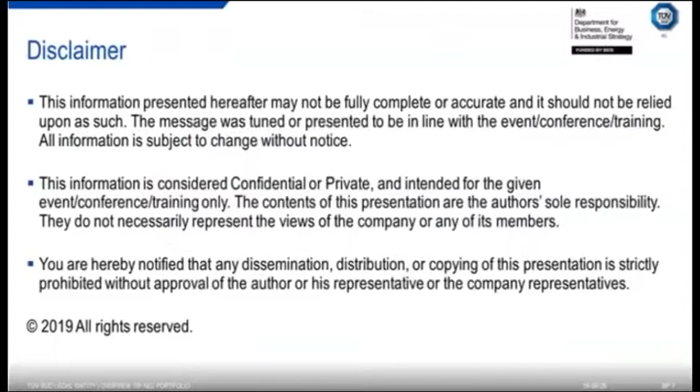So the contents will be a quick overview of what is NEL, if you don't know about NEL. And then I will develop my talk around the new facilities that we have here. Very often on my slide, you will see I call it AMF, which stands for Advanced Multiphase Facilities.

Through this new facility that we are building here, or which is built now, I will propose and discuss about a joint industrial project about validating the measurement of multiphase flow meters and wet gas meters.

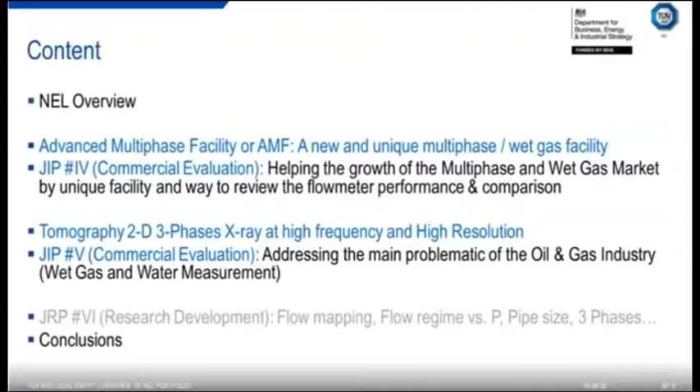So, NEL, National Engineering Laboratory, we are on a campus here in Scotland. As I said on this slide, it's a one-stop shop for anything related to flow measurement and density, could be in single phase, could be in multi-phase.

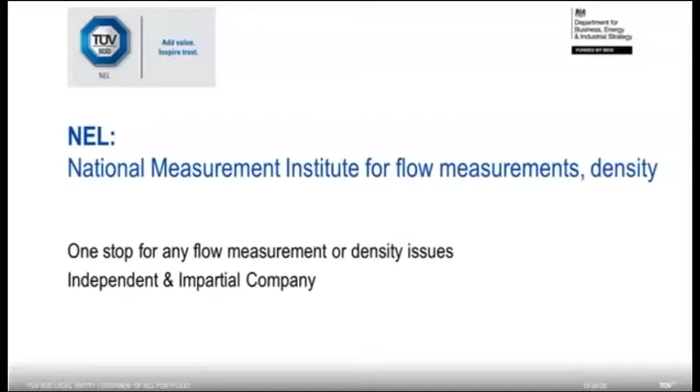NEL is an independent and impartial company, which is part of a much bigger corporate company called TÜV SÜD, and this is why you can see the logo with the two companies on the left side.

NEL was established some time ago, just before I was born, and went through different processes. I would say the key one was in 1995, where NEL was, as I mentioned on this slide, half a public company and half a private company. And this is what I mentioned previously, with the fact that we are now part of the TÜV SÜD corporate.

NEL is, and that's something very important to remember, a National Measurement Institute, so we are a primary calibration facility for single phase measurement, could be in gas, oil, or water.

We are conducting some research on behalf of the UK government, and we're getting some funding from them. This is why, again, I'm mentioning that we are a public company.

We are roughly 100 employees here, 10% doctors and 45% engineers. Really the core of our work here is about traceability, accuracy, and calibration in the first place.

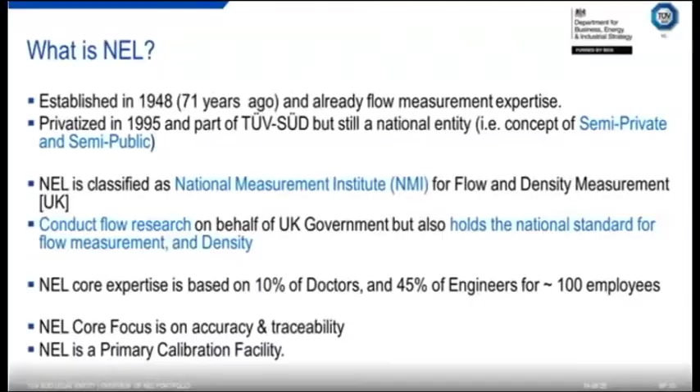So what are our customers? We are in oil and gas most of the time, and I give you some logos here. If we look at the metering side, through the survey that we have done, it seems that we have handled more than 98% of the products existing on the market in terms of flow measurement, either in single phase or in multi-phase.

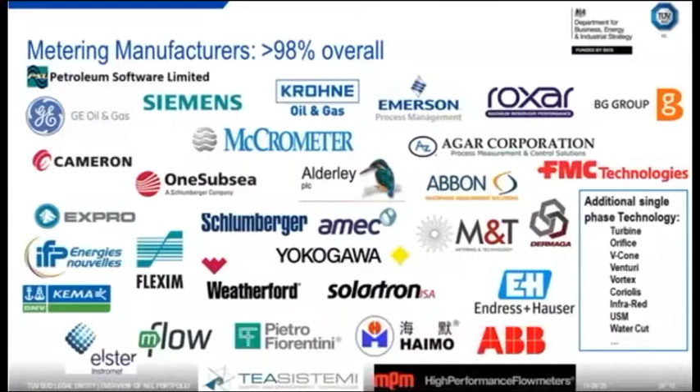Our structure is a very flexible structure around three main poles. One is research and development. The other is facilities and experiments, and I will show you the latest one. And in green, the services that we are providing to our customers around the world. People can interact between these three main poles. We have a pool of international experts in different domains that will float among these three entities.

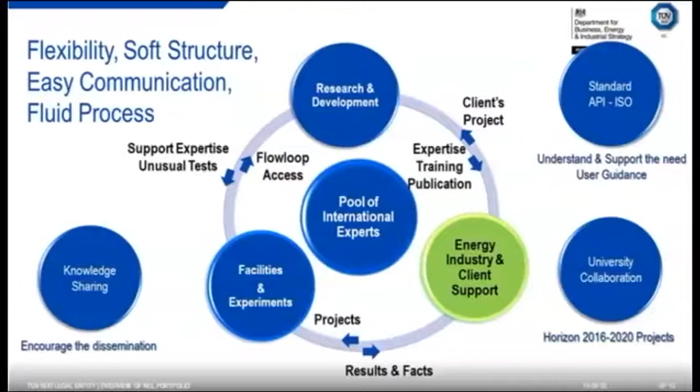On top of that, we are known to work on standards, with some of you probably, on API and ISO. We have a lot of interaction with universities in different areas, and one of our strengths is being independent. We are sharing our knowledge through either conferences or training.

This brings me now to something unique, new, and I will try to explain how we came to this solution. You see the summary already, it's 20 times bigger than what is existing around the world, and I will justify this statement just after.

You may be surprised to see another logo on this slide, but to develop this facility, which cost roughly $21 million, we needed some sponsors, and this came from the mother company TÜV SÜD, but also from Scottish Enterprise, which was able to support this new project.

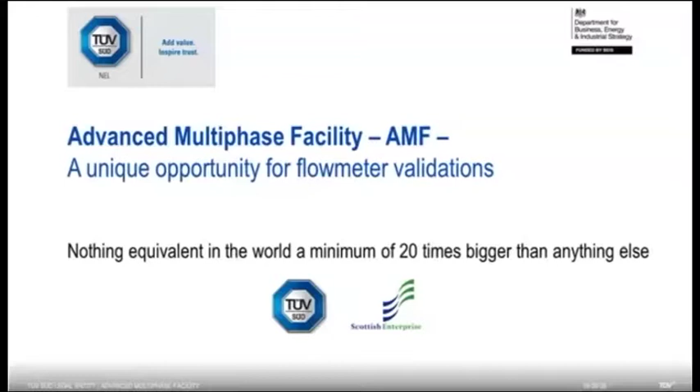Building a new facility could be interesting, but at the same time, NEL already had 9 facilities by 2014. We have facilities for single phase calibration under water or oil, capability to look at calibration of single phase under pressure and temperature, some erosion flow loops, and we are also deeply involved in produced water, looking at contamination of the water, either with sand or oil.

Obviously, with such a portfolio, you try to improve your product over time, and around 2014 we saw that we would not be able to address the market beyond 2020, so we needed to change the way of thinking about that.

To invest money, the first thing you need is a proper understanding of the market trend, and this is what we did, interacting with our key customers, which I'm listing here in a generic way - in the oil and gas domain, like national oil companies, international oil companies, or independents.

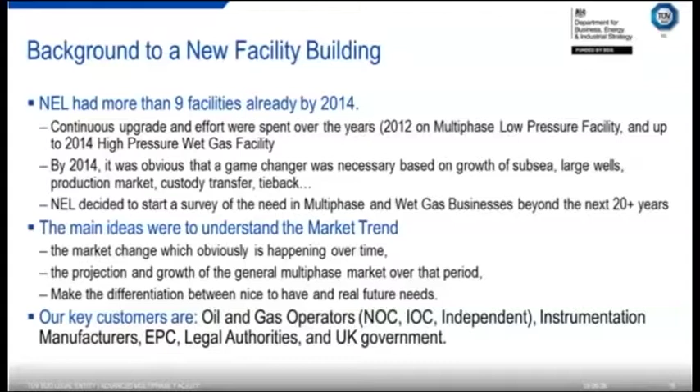The first one refers to the subsea market. There is a big interest in the subsea market, you may know it's growing, and on top of that, they want to be able to test and verify the performance of the meter in an independent and impartial way. So they needed a facility capable to handle large flow rates, capable to go to higher pressure.

The second point, as I just mentioned, is that in the subsea market you'll go to high pressure. Most of the facilities existing around the world are at 60 bars or below, and they wanted something to go way above that.

The business also has been moving over the years, you may know that. We were in the oil industry, and more and more we're going to a wet gas industry, so they wanted a facility capable to address wet gas meters and able to accept a large quantity of liquid when necessary.

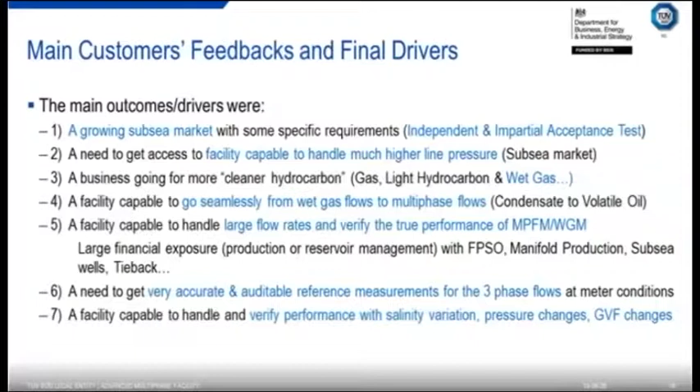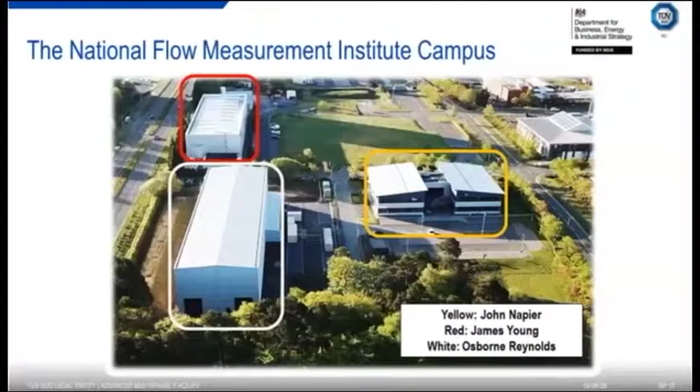I'll give you an idea of the size here. This building is 80 meters long by roughly 20 meters wide. If you prefer, it's almost half the size of a soccer field. This is where we will have these advanced multiphase facilities inside.

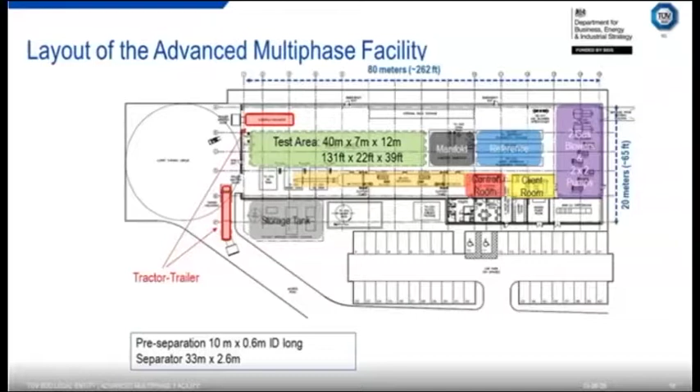To give you an idea, the separators are, for example, 33 meters long and almost 3 meters in diameter. So you may start to feel that this facility is huge, and we will definitely be handling large volumes in terms of flow rates. To give you a picture, you have 2 truck trailers on the left side that can go in and out of these facilities to bring equipment and so on.

We have, for reference, on the oil and water, they are twins, if I can say that. We have a 1-inch, 2-inch, 4-inch, and 6-inch Coriolis. And for the gas, in terms of reference, we are using either Coriolis for low flow rates or ultrasonic for large flow rates, with a 3-inch and 8-inch.

All this equipment obviously needs to be calibrated under pressure and temperature. You may know that Coriolis meters are affected by these parameters, and we have the capability here, through one of the other facilities, to do this calibration and traceability, which is essential in this business.

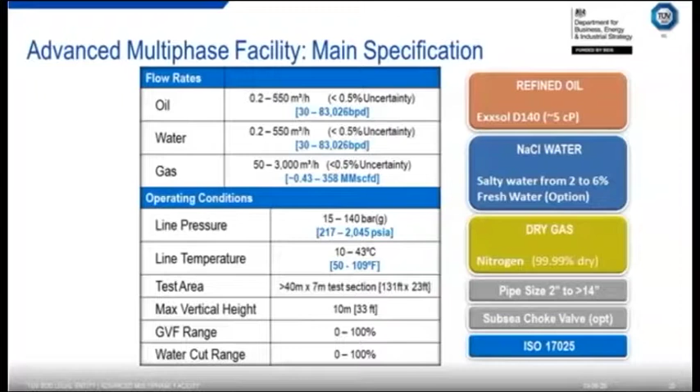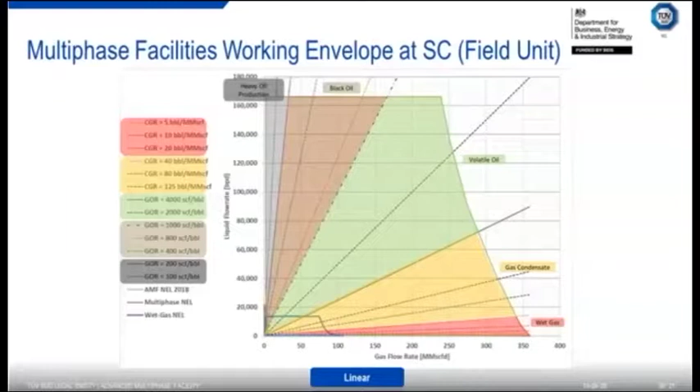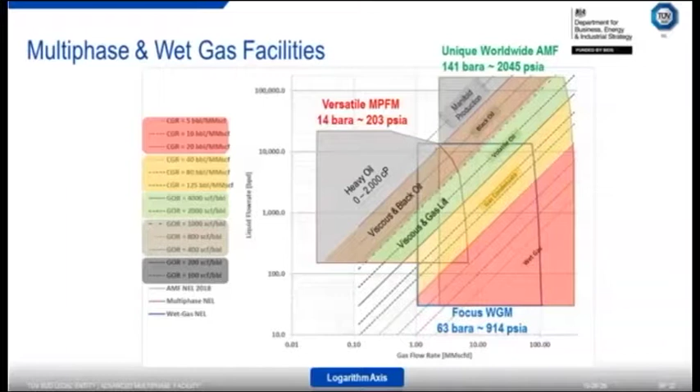We have the high pressure wet gas facilities, which was obviously called high pressure at that time. Now we have a bigger pressure with AMF, but it's shown in blue, and it's addressing wet gas business and gas condensate essentially. The loading or quantity of gas or liquid will not be above 15% in a base case, so you work with a condition where the quantity of gas is large. And we have the AMF, which is capable of going either on the liquid side or the gas side. This gives you an idea of the offer we have here, from low flow rate viscous fluid to high flow rate, low viscosity, or wet gas condition.

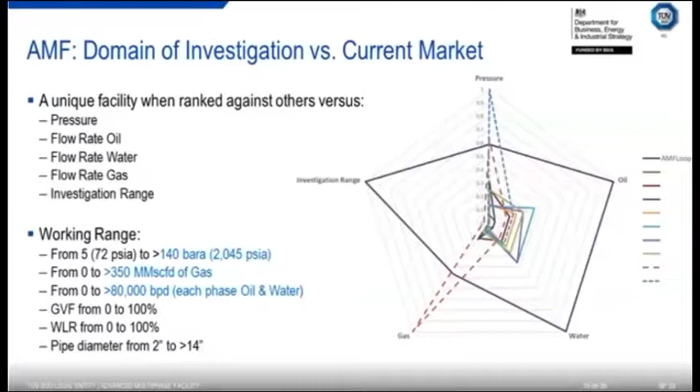So, stated differently, there is one facility that can go much higher than us in gas flow rate, probably 50% more, and there is one facility capable of going higher in pressure, but they are not capable of dealing with such a quantity of flow rate that we have here.

So what it means when you have such a facility, is that we can look at any type of flow regime and the performance of the meter in such conditions.

I'm presenting here, in this 1 hour time that I have, only one type of flow regime, which is the horizontal one, but you can imagine that the flow could be vertical if we want, and we are capable of addressing any type of them, from mist flow to stratified flow to bubble flow, plug and slug flow, annular or pseudo-annular flow. This is the capability of these facilities.

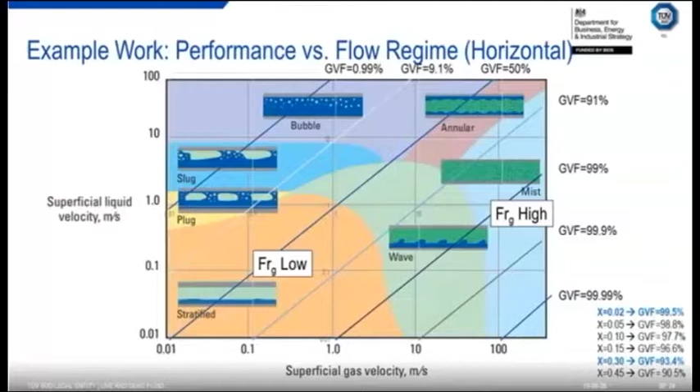You connect the meter and you can look at the performance in such flow regime. So, what are we capable of now with this institute here on this campus, in terms of business?

We can go from the brown, even heavy oil, to the green field. We can address from heavy oil to wet gas condition. We can address shale oil, shale gas, low pressure, either with a lot of liquid or gas.

Up to a subsea business, where you will be in a wet gas condition with high pressure, which gives us also this capability in terms of pressure to go from very low pressure on one of our facilities to 141 bar on the AMF facilities. Gas virtually from 0 to 350 million standard cubic feet, so you can imagine we are not talking about wells.

There are few wells that can do these things in the world, but most of the time 350 million will probably be when you have a commingled production from a few wells.

In terms of liquid, as I said, each phase can go up to 80,000 barrels per day, so together that will be 160,000 barrels of liquid per day.

And we can address any problem you may have today, in terms of solids, like fines or sand, erosion or monitoring, and we have a facility capable of handling up to 10% of such quantity.

I mentioned it earlier, we are working a lot on the produced water, and we can look at the contamination at the ppm level that is presented on this.

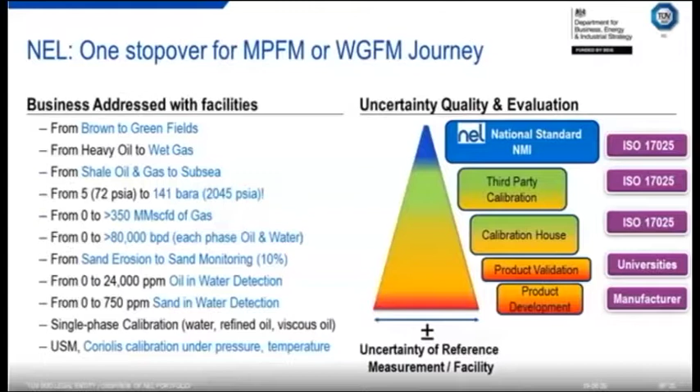This is something that also changes the quality of the facility where you are going to test your meter. I want to answer right now one of the questions that I very often get when presenting the MPFM. It's regarding the type of fluid we are using. The three fluids that we use are Exxsol, salty water, and nitrogen.

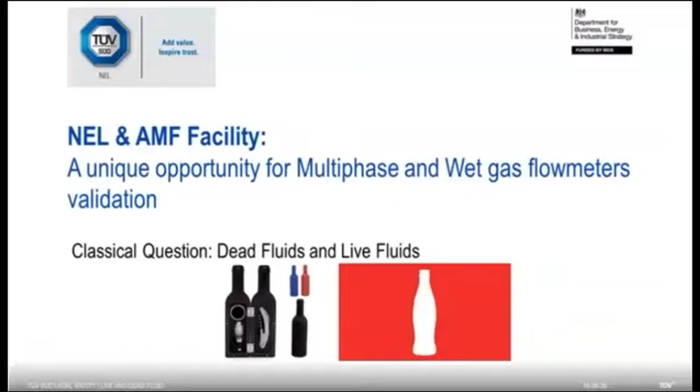Everybody says, yes, but in the field I have some live fluid, are you capable to handle such things? You may not know exactly what is dead fluid and live fluid, but I'll give you some shapes of bottles so you may understand what I mean. Some have gas dissolved inside, and some have no gas dissolved inside. This is what people are talking about when they say dead fluid or live fluid.

First thing we need to understand is if you are coming to these facilities, it is to test or validate a multiphase or wet gas meter. So we need to provide the best uncertainty measurement, and we need to do this work in the proper manner in terms of evaluation, either for the manufacturer or for the end user.

Keep in mind, there is a warning here: the expectation of the manufacturer and the expectation of the end user are not the same. You could be surprised by that. We know they are developing a multiphase meter and the idea is to get the best performance. If you look at it from a manufacturer's point of view, the idea is to provide a product capable of delivering the best uncertainty at line condition.

There are experts in some technologies, and they combine these technologies to develop a multiphase meter or wet gas meter, trying to improve or combine in a smart way these techniques in order to deliver flow rate at line condition. But as we know, at line condition you may have some gas dissolved in your oil, or some liquid condensate which is in gas form and will become liquid at standard condition, and therefore you will need to convert these through some PVT.

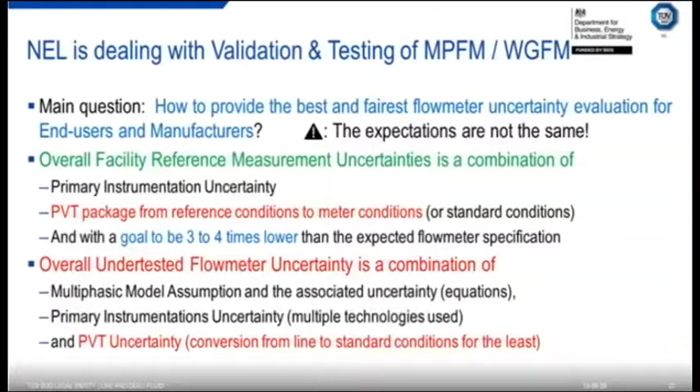On the other side, we need to face it: developing a multiphase reference flow meter is a complex system, and the uncertainty will be a combination of the model, the physics you will be using, the instrumentation or technology you will be using, and also the fact that you will need information about the fluid properties and the conversion you will need to do with that. This is what you are dealing with when you want to look at the performance of a multiphase flow meter or WGFM.

So if we look at it in a simple manner, we have the reference condition, which is delivered here by a facility on the left side, and then we have the measurements which are done with a meter.

Okay, the idea is to do the comparison between this cylinder, red for the gas, green for the oil, and blue for the water.

To do these things, you will need to use some numbers or parameters, and I show you here the list of parameters you will need to use to do this conversion if you are in field condition. You will need the BG, the BO, and the BW, which relate either to the expansion of the gas versus pressure and temperature, or the shrinkage of the oil and water versus pressure and temperature.

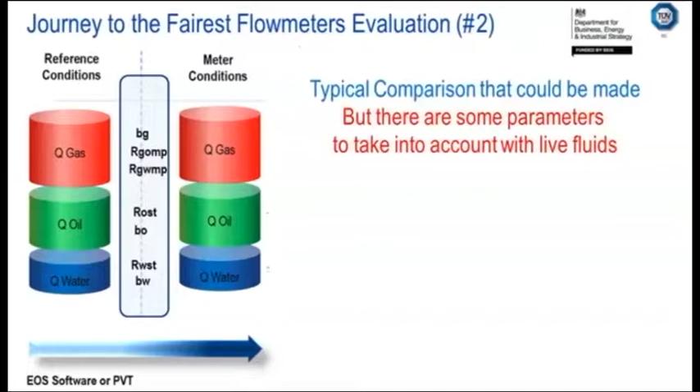The other parameters, starting with R, refer to either some oil which is in gas form, or water which is in gas form, or the opposite, some gas dissolved in the oil, or some gas dissolved in the water.

You know one of them very well, for example CO2 - it's in all the Sprite that you are drinking, and it can be dissolved very well in a gas, in a water, like H2S.

So now we start to understand that comparing the reference measurement and the meter performance or meter measurement, you will need to use either an EOS, equation of state, typical of software, or a PVT table or something to do this conversion.

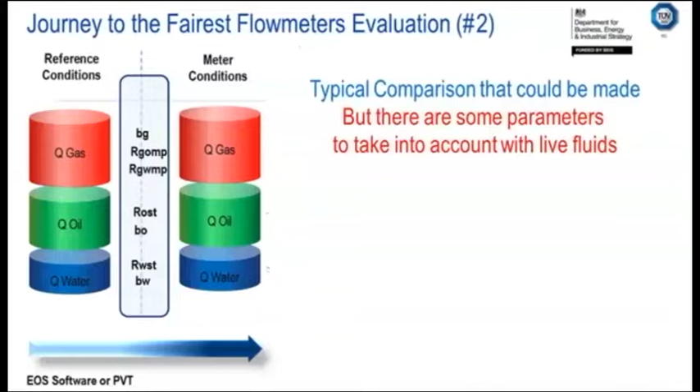So if we look carefully now at NEL, I'm always referring to NEL like a facility where we have non-miscible fluid, but to be fair, as soon as we reach a bit of pressure, we get 60% of nitrogen dissolved in oil, and roughly 1% of nitrogen dissolved in the water.

So this means I will probably need to use all these parameters to do a proper conversion from reference condition to meter condition. Is it good news or bad news?

Probably if I present this slide like this to the oil and gas companies, they will say this is very interesting, we're much closer to field condition, even if field conditions are way different than any facility in the world. But on the manufacturer side, they say, now you have some gas here, so probably the uncertainty of your facility is increasing.

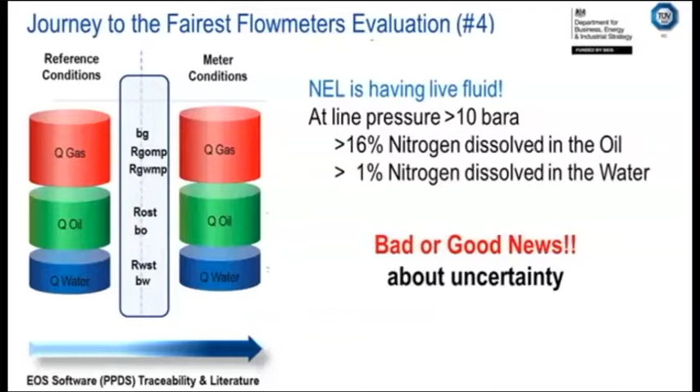So I'll make the statement right now, because some people could be scared now - there is good news. Yes, we have some dissolution of nitrogen in the oil and the water, but if I look at even 60, 70 bar of pressure loss, like I present below, between 38 to 122 bars, the concentration of gas that will come out of this solution is way below 0.2%.

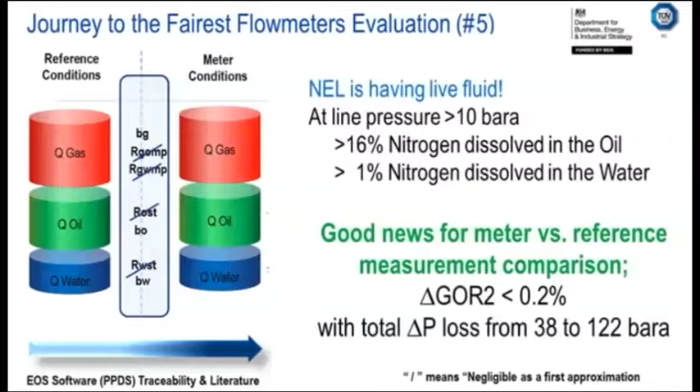So on this slide, for the purpose of this presentation, I'm just saying that it can be negligible. Therefore, we can do the comparison at line condition, the reference and meter condition, by removing most of the parameters we have here and keeping only the shrinkage factors and the expansion factors. And this is great news from a manufacturer point of view.

Now, if we want to do a proper comparison at standard condition, here I will need to use the PVT conversion, okay? And then it will be a nice way to demonstrate the performance, for example, of a multiphase flow meter, using not only the technology, but also the conversion or package they have to convert from line to standard condition.

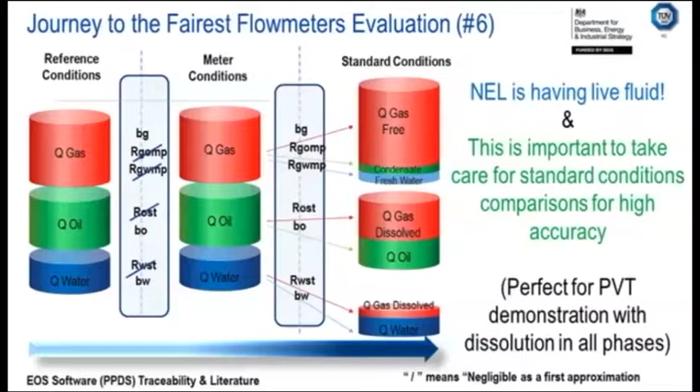And this is the beauty of this facility, where we are capable of dealing with high pressure, therefore a lot of gas dissolved in oil, and following how we do this comparison, taking into account or not the uncertainty associated with the PVT package.

So all this long talk about the AMF, Advanced Multiphase Facilities, is to bring you to topics that for me I feel are extremely interesting. It's NEL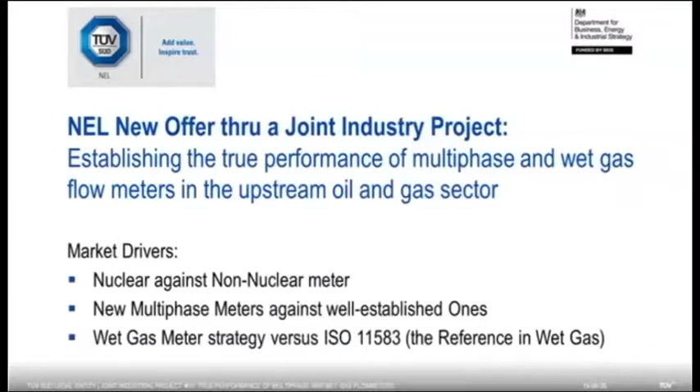trying to contribute and share knowledge, and we want to propose a joint industry project, a JIP. We have been doing JIPs in the past - we had one in the 90s, mid-90s, one close to the millennium, and one just after the millennium, which were addressing different topics.

I will not go through this slide in detail. You will have it - you can see the oil companies that were participating in this JIP and the manufacturers that were selected by this steering committee to be tested one after the other, on the different facilities that we have here.

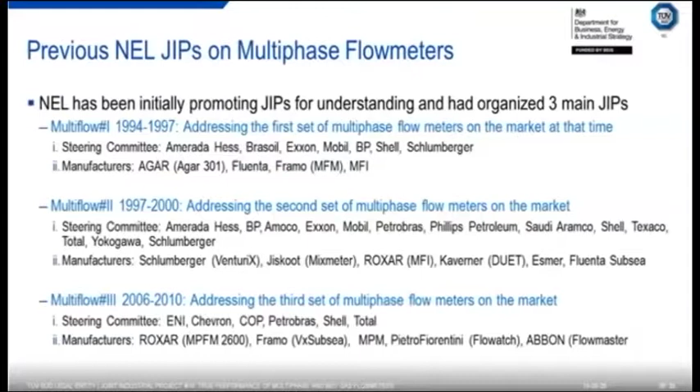So what we are doing today is, over the last 9 months, Anna and I have been starting to go around the world and promote a new JIP, based on the motivation shown on this slide here.

We have seen the market growing more and more in terms of use of multiphase and wet gas flow meters. Over the last 5 years there have been a lot of new kids on the ground, with some innovative ideas and different perceptions. We have also seen a trend where people are more reluctant today to use radioactive sources, so the latest technology tries to avoid it. Are they better or not than the old technology? This is something that's probably interesting to look at.

We have a change in our business, moving more and more from the oil side to cleaner or green wet gas and gas conditions. So obviously we need to look at the performance of the meter in this area. Some wet gas meters claim they can work in multiphase conditions, and conversely, some multiphase flow meters claim they can work in wet gas conditions.

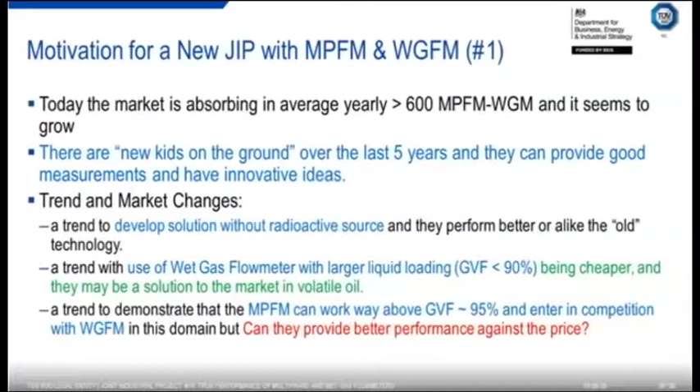So all this means there is motivation and interest to look at what we could be doing with such meters today on the market. On top of that, the last JIP finished in 2010, and most of the products tested in 2010 are no longer on the market, or they're obsolete, or they've been changed. So I think there's a good opportunity to develop a new JIP.

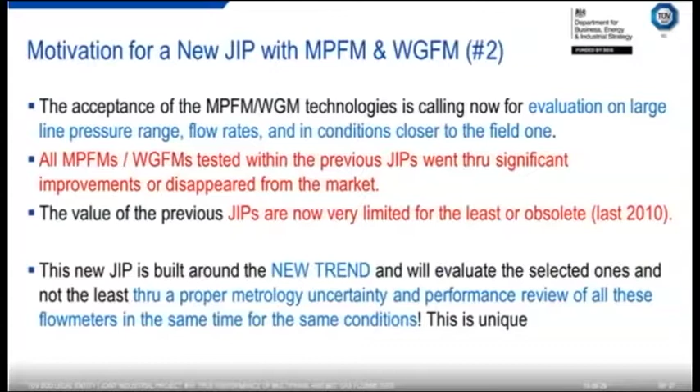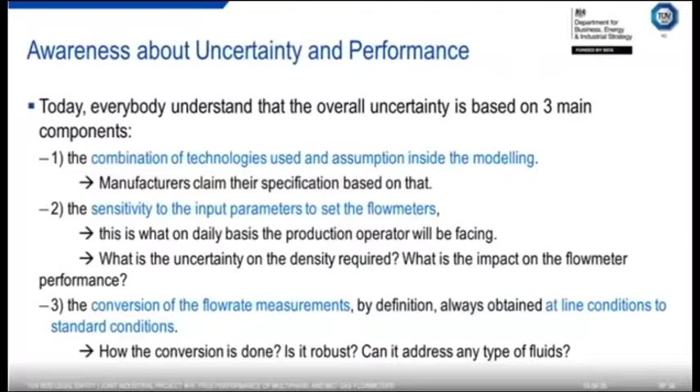The idea is related to three things: the combination of technology they are using and whether it works or not, the sensitivity of the parameters you input to the meter, and the PVT package going from line condition to standard condition.

So what are we planning to do here? In terms of JIP, we are planning to have a steering committee with all the oil and gas companies. Manufacturers cannot participate in that. And we will be selecting some meters.

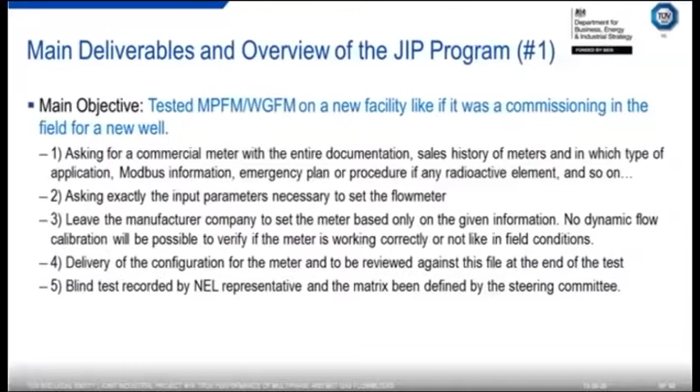They will be selecting some meters, and then we will test these meters one after the other. All these meters will be tested in a blind way, and the data will be available for each meter to the manufacturer, and all the data for the steering committee.

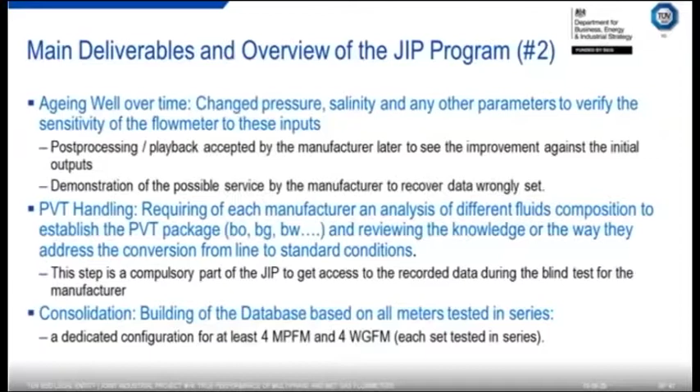The idea is to look at what I said earlier - I won't spend too much time on this slide - but to look at the salinity change, the pressure change, and all the conversion from line to standard condition.

So what are we planning to do? We are planning to look at least 3 different pressures, 2 different salinities, 11 different GVF, 9 different WLR, and I hope we can test 4 multiphase flow meters in one go and 4 wet gas meters in one go.

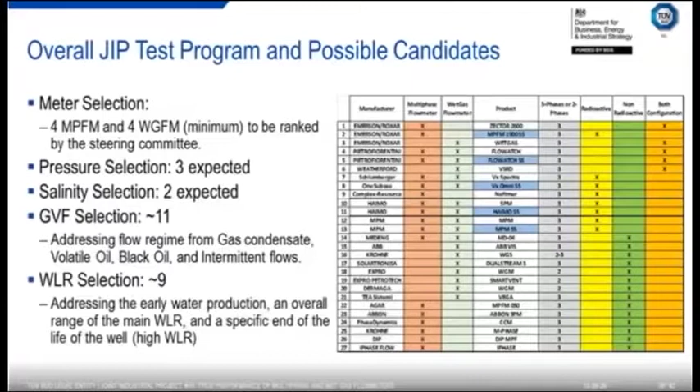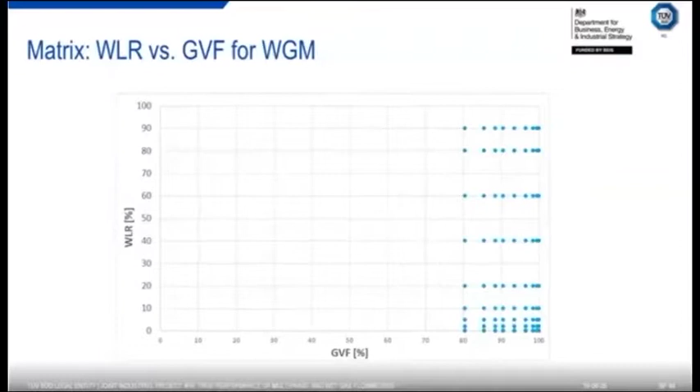The idea is to look at the low range, the middle range, and the high range of these meters, to look at, in terms of GVF versus WLR, what we are capable of achieving in terms of uncertainty for wet gas and for multiphase flow meters.

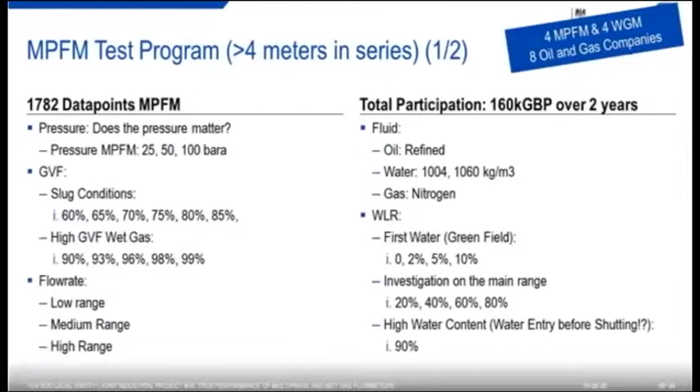At the end of the day, I'm expecting we will have for each meter more than 1,700 data points at different pressures and different GVF. The price to participate in such a JIP is presented here - roughly 160,000 pounds over 2 years. The first year you pay 80,000 pounds, and the second year 80,000 pounds, and then you get access to all this data.

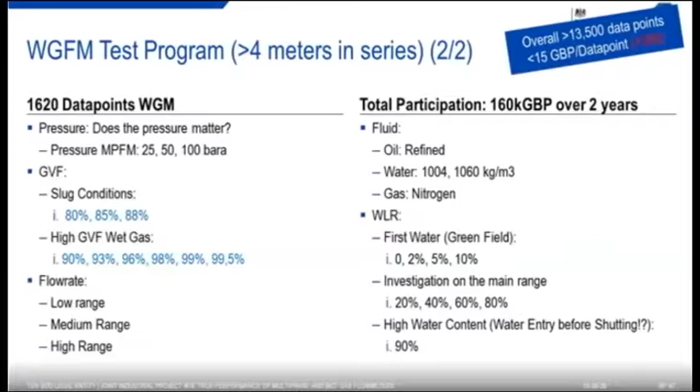For the wet gas it's the same story - multiphase and wet gas programs are the same. It's the same JIP, just with different conditions, and here we get another 13,000 data points to look at the performance of such products. So the idea of this JIP number 4 is really to look at the performance of multiphase flow meters and wet gas meters in the upstream oil and gas business.

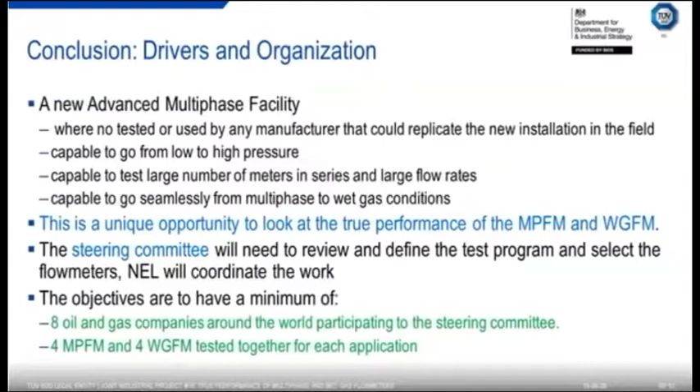This is open to you. Some of you will be contacted by me or Anna. We are planning to go for another month around the world before we close the first round, and then we start to present to the steering committee what we are planning to do.

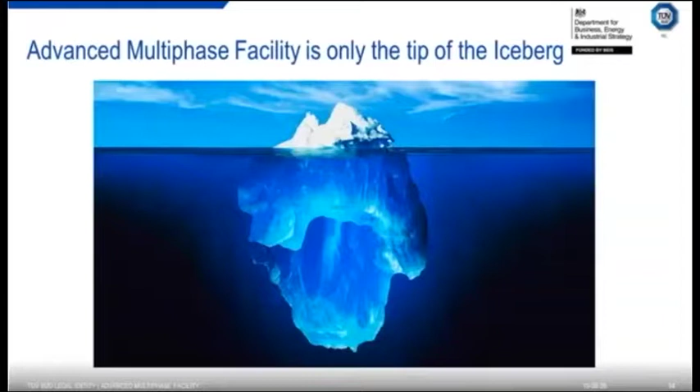Advanced multiphase facilities are not only related to the pipe, it's also related to new products that we have on the market, and I will go very, very briefly to one of them.

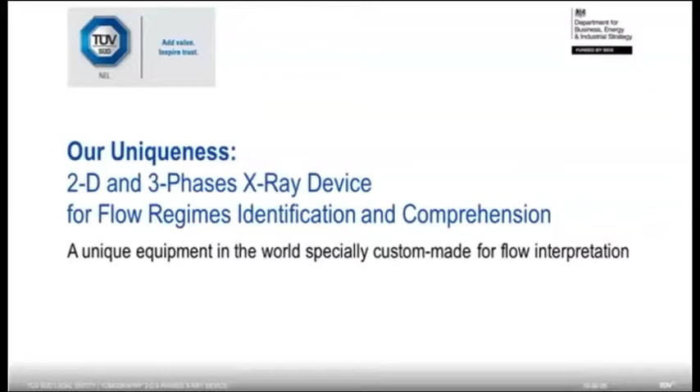NEL has been investing a fair amount of money, and we have today a tool which is a 2D 3-phase X-ray device. It's a tomography product capable of going to high frequency, and I will show you some pictures of that and the beauty of what we can achieve with such equipment. X-ray, all of you know X-ray, at least you've seen the black and white chest X-ray. There are some new products existing in hospitals today where you can have a nice color one.

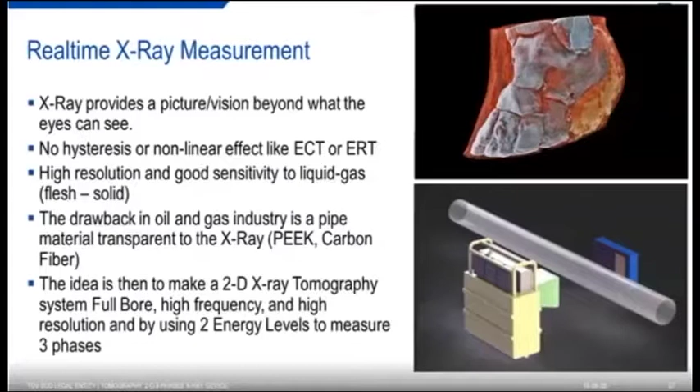What we have done is take such a system and develop it for pipe configuration in our case, and look at the 3 phases: oil, water, and gas. The product was made by a company in Norway, and we have a very high acquisition frequency, reaching 191 hertz or 191 frames per second. We use X-ray here because we can penetrate a pipe and look at the full section of this pipe.

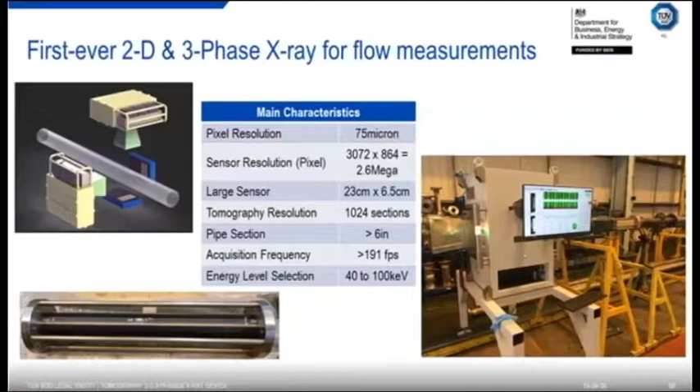So what are we getting? It's such a picture as you see here. On the right side, you see an X-ray generator on the top and one on the side, and they are beaming the same spot on the side and on the top, and you get two pictures. Adding these two pictures versus time, since we numerize everything nowadays, or digitize if you prefer, we are capable to look at, for example, on pass number 1 here, the holdup in terms of oil, water, and gas.

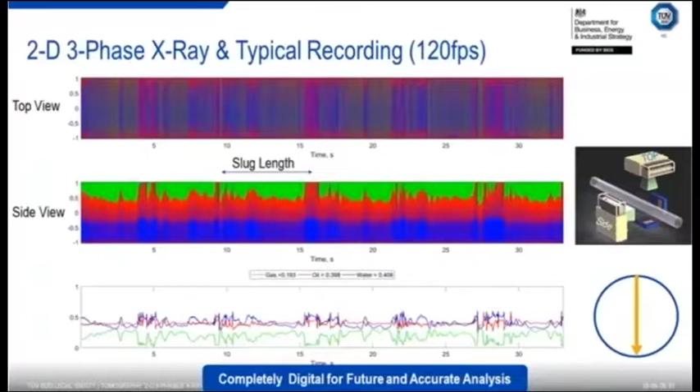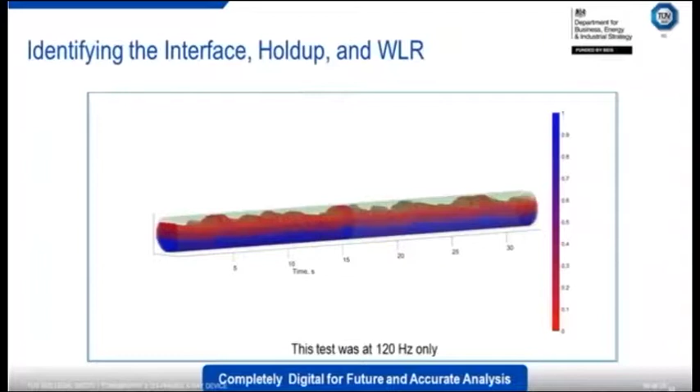But we can do much better than that. We can look at, for example, the interface between the liquid and the gas. We can look at the concentration of the holdup that we have in gas or in liquid. We can even make the distinction between the water and oil and get access at high frequency to the WLR measurement.

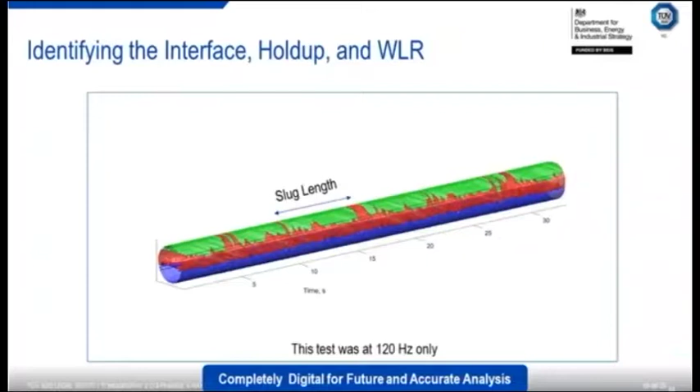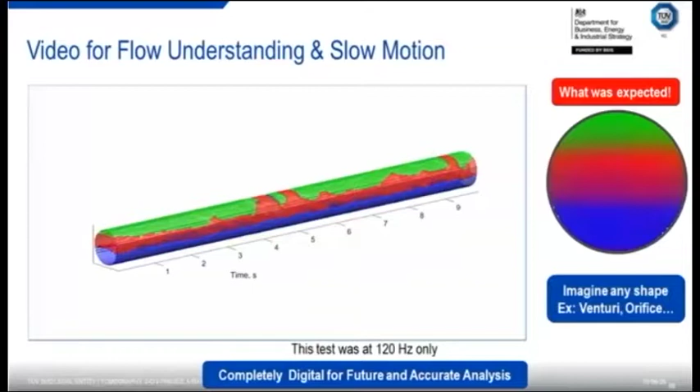Obviously, something beyond is to look at the structure of the flow, whether it's a sluggy flow or not, and what are the lengths and frequencies of such things. So here you can see, for example, the pictures on the left side, where you see a sluggy behavior, but on this horizontal pipe we were injecting exactly the same quantity and stable quantity of oil, water, and gas, and what you were expecting is what is presented on the right side. Most of you know fluid mechanics is not as simple as that, but you can see the difference between what a model may be assuming, or what you may assume when you develop a multiphase flow meter, and what the reality is on the other side.

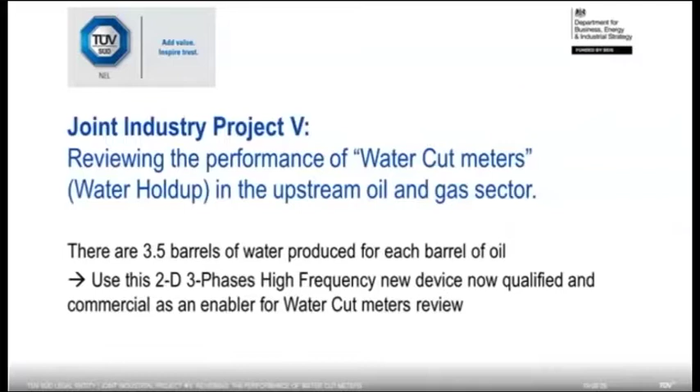You may or may not know that each time we produce 1 barrel of oil, we are producing on average 3.5 barrels of water, and therefore this is a loss of money because we need to process this water. So first, this water cut meter - are they working in all conditions? For example, in a horizontal pipe with some sluggy behavior, as I showed you, does it work or not? This is all the question.

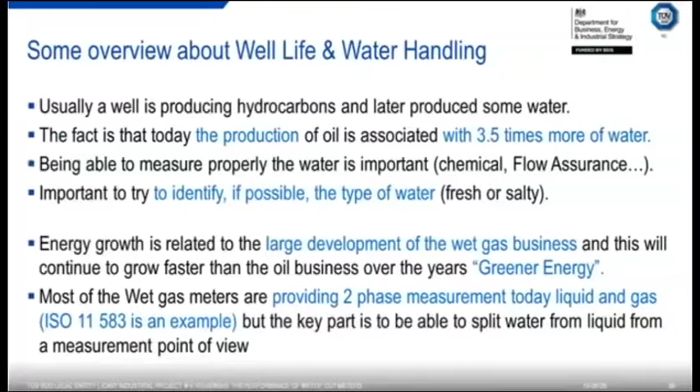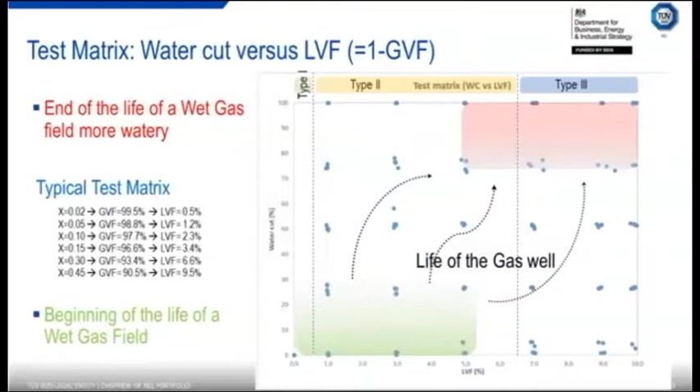Very often nowadays, wet gas meters are developed and capable of giving good accuracy on the gas and a fair statement on the liquid, but they never distinguish between the oil and the water. So obviously you need a water cut meter in such conditions. There is a need to look at the performance of such equipment, and even if you look at the life of your gas well, you will go from hydrocarbon production to something more watery in the future with a fair amount of liquid produced with the gas. So again, there is an interest to look at this water cut meter.

There is plenty of water cut meters on the market. I have a list of 14 of them, and I'm sure I'm not addressing all of them on the market. So all the idea is, what are they doing? Are they good?

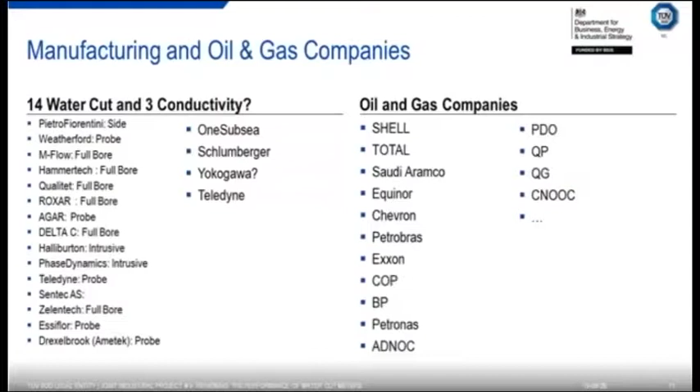The pricing are more than a factor of 10 between themselves, so there is definitely something to look at here, and this is why we're opening this JIP number 5 about water cut measurement.

So here we are planning to do exactly the same thing as for the multiphase and wet gas facilities. It's to make a program over 2 years.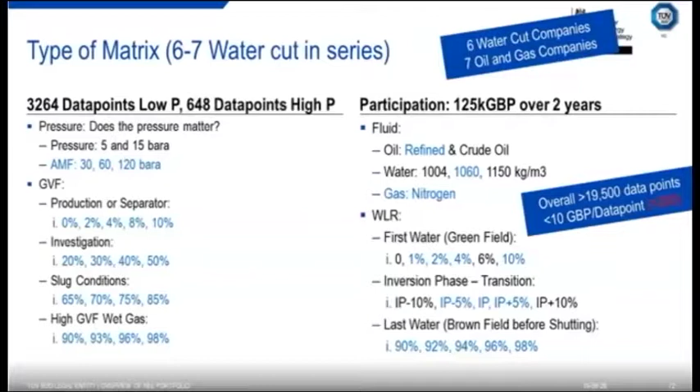Here the participation is slightly lower than the previous one. It's 125,000 pounds over 2 years. We are expecting that we will be selecting 6 to 7 water cut meters, and we are expecting to get 7 oil and gas companies, and therefore we could look at the 6 to 7 technologies in one go and see the performance of such equipment, either in low water production or very high water production, or around the inversion phase and a different type of GVF.

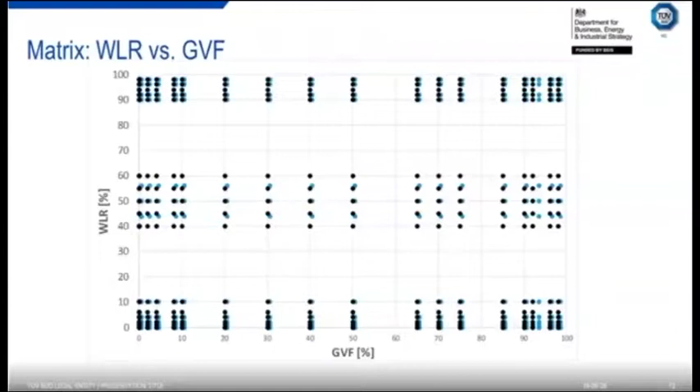This is what this slide is presenting here. So remember, there is a joint industry project number 4, which is associated with multiphase and wet gas meters, and this number 5 here is addressing the water cut performance and screening what is on the market today.

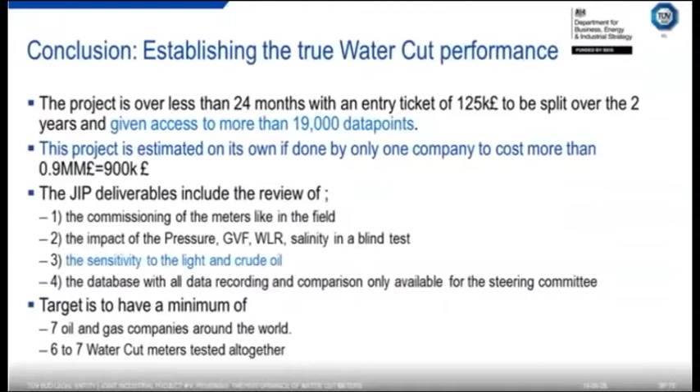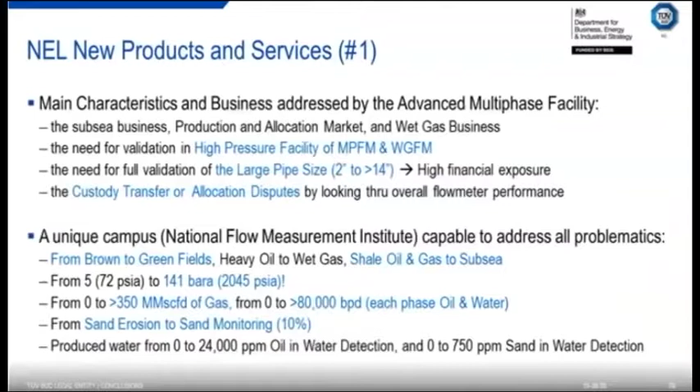So now I'm reaching, and I'm sure I'm slightly late, the main conclusion on what we are providing here. So on this campus now we have a new facility, the AMF facility, which can go high pressure, high flow rate, as I mentioned, and we have all this portfolio addressing the knowledge in terms of either solid in a liquid, gas in a liquid, and we have some new products around that.

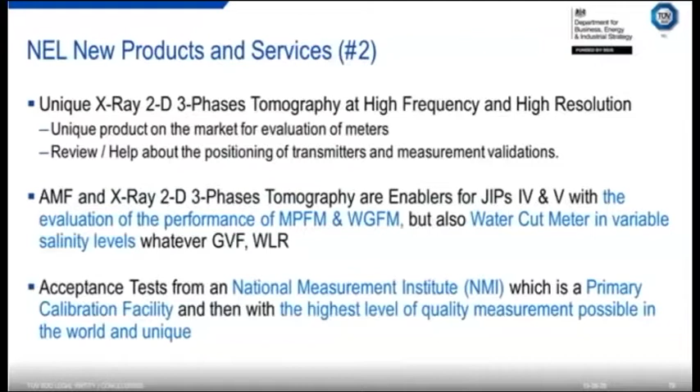Like the X-ray 2D 3-phase tomography, which can look at what are the flow, the type of flow that you have in your pipe. Is it sluggy or not? Is it more misty flow, or is it more bubble flow? All these things are the things that we can do here right now.

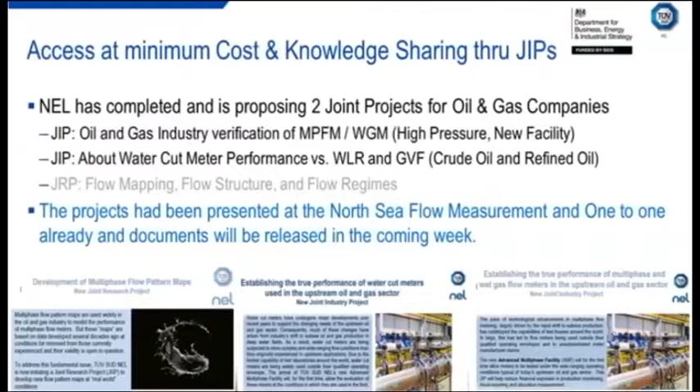So information about the JIP is available on the website. You can contact me, or you can contact Anna for any of this JIP. As I said, we are still going around for a while, and we will close this first round, as I said, next month, and we will have a review of these things by October. So I think I finished here, Anna.